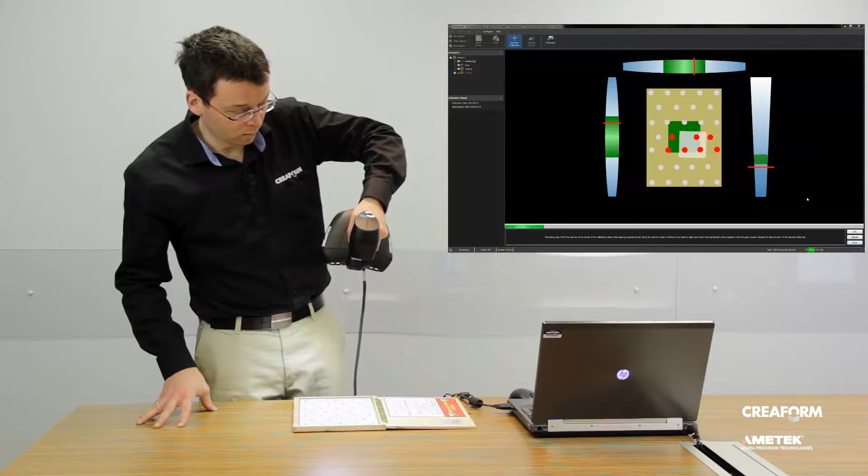Performing a scanner calibration is always good to do once in a while, especially if you're traveling a lot with your scanner. It's very easy to do—just aim at your calibration plate. This will optimize the performance of your scanner as well as the color calibration and ensure that you get the most out of your GoScan 20.

Okay, so our scanner is plugged in, our demo part is ready, but before we start scanning, let's take a look at some of the important settings in VXelements.

First of all, the project node. Here you'll find the capture texture button—basically an on-off trigger for the color camera on your scanner. If turned on, it will allow you to use texture either to capture the colors of the object or to refine the positioning of the scanner. If turned off, however, it will improve the capture frame rate of the scanner, leaving more bandwidth for the other 2 cameras. In our case, for the purpose of our demo, we'll leave it turned on.

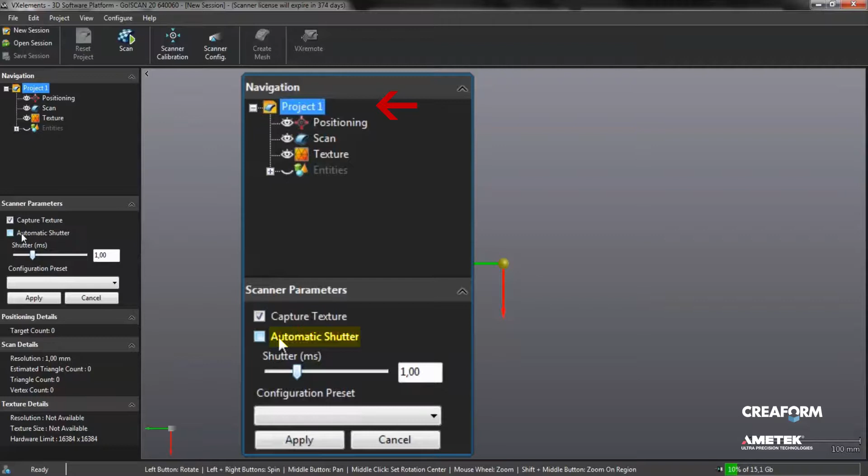Automatic shutter will constantly adapt the camera exposure to the colors of the object. It's good for objects with important color variations, but in our case we'll turn it off, as our demo part is a rather uniform part.

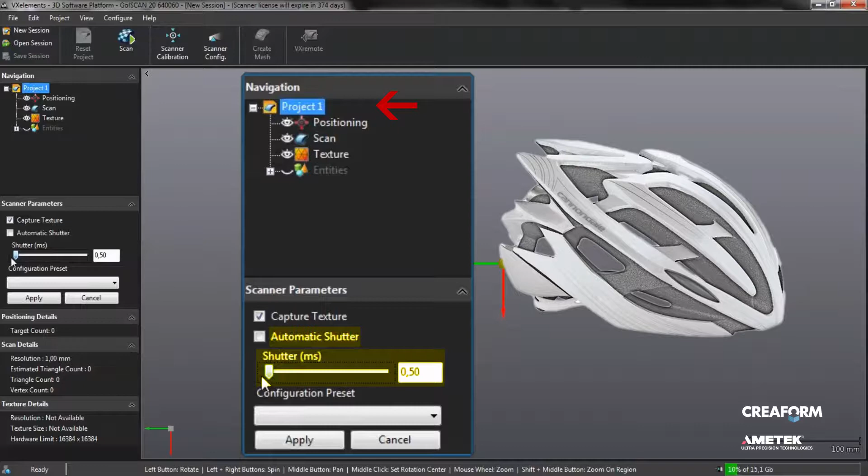If setting the shutter values manually, setting your shutter towards lower values is good for lighter objects or white colors. Setting it manually towards higher values is interesting for darker colors. In our case, for the demo part, we'll leave it as a default value.

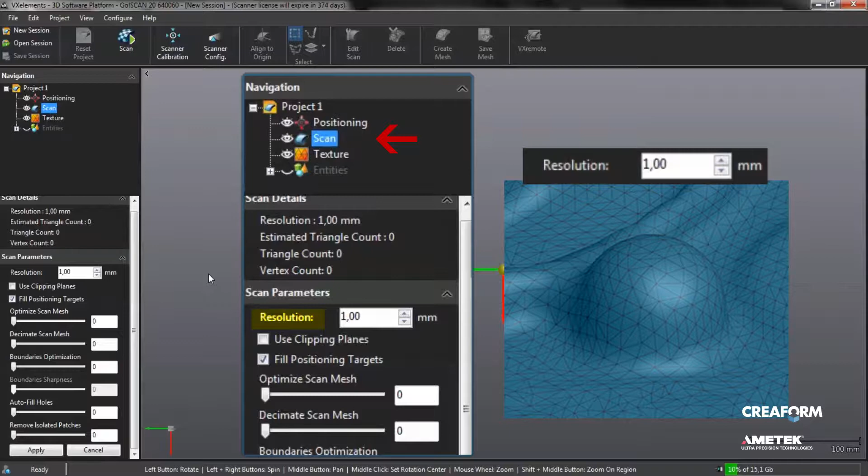Next is the scan node. This is where you set the resolution of the scan, or the size of the triangles that are going to be used to reconstruct the mesh. A finer resolution provides more details, but the finer the resolution, the more data you will get and the more demanding it will be on your computer. So to scan something like our demo part, I like to use a resolution of 0.5.

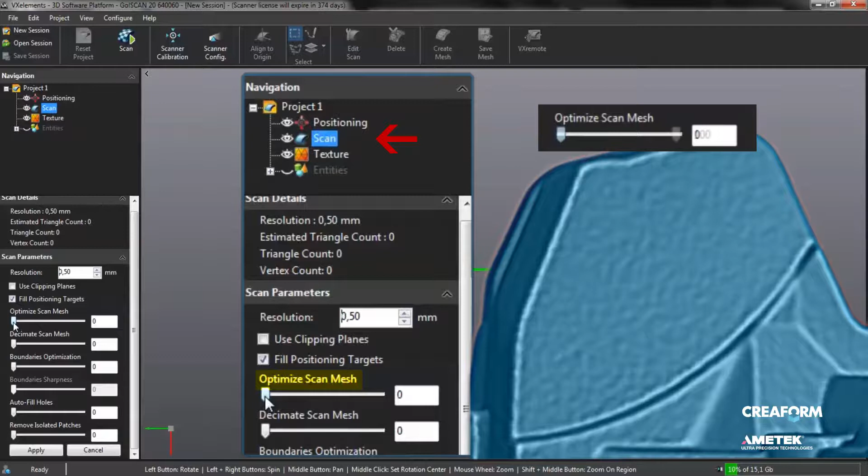Next, the optimized scan mesh is something that smooths the data and keeps the edges sharp. It's particularly interesting for prismatic parts, and for the purpose of scanning our demo part, we'll set it to the very maximum limit. Next, it's interesting to set a certain value for remove isolated patch, so I'll set it to 20 here. This will automatically remove unwanted data that's flying around your object. No need to use other parameters for now.

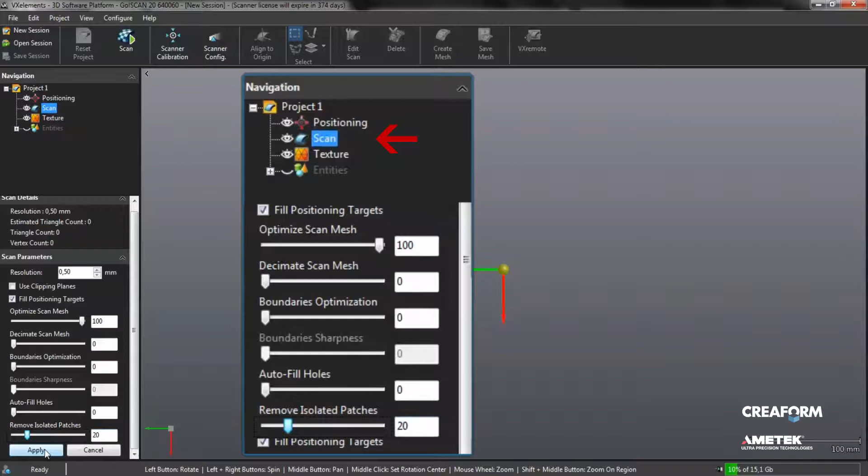We'll just click apply. Positioning node is where you have different options related to the positioning of the system. In our case, we'll turn on use natural features. This will identify recognizable elements of the texture that are usable to improve the positioning of the system.

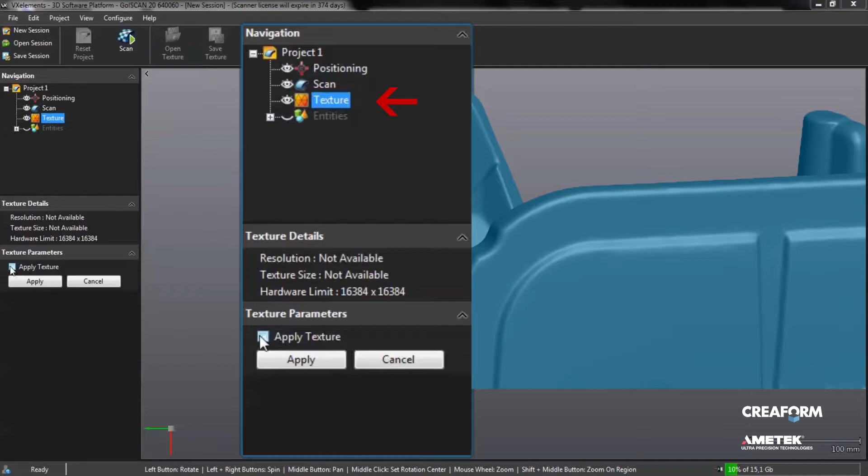Finally, the texture node. This is where you access options related to the texture. So of course, to scan our part in color, we'll click apply texture, and we'll leave the values to default, as they're going to do a pretty good job with our demo part.

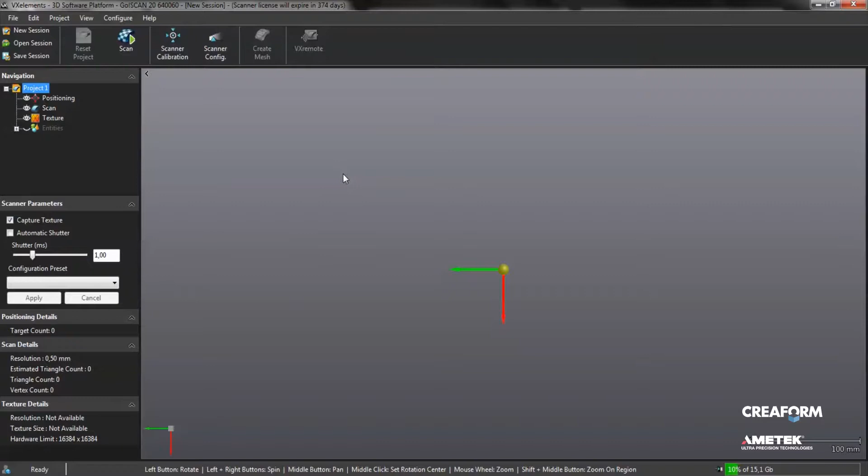If you wish to save time, you can always go to your configure menu, in session parameters, and select save current settings as default session parameters. This way you won't have to run through all these settings again for your next session.

So we're now ready to scan. Before we start scanning, you should know that having targets applied onto your demo part is not mandatory, but is definitely going to help. So when you're ready, simply place your part onto your turntable and start scanning.

When scanning a part, hold your arm steady and at the right distance, and manipulate your part using the turntable. This makes it much easier not to get lost, and if you ever do get lost, go back to a known target location to resume scanning directly.

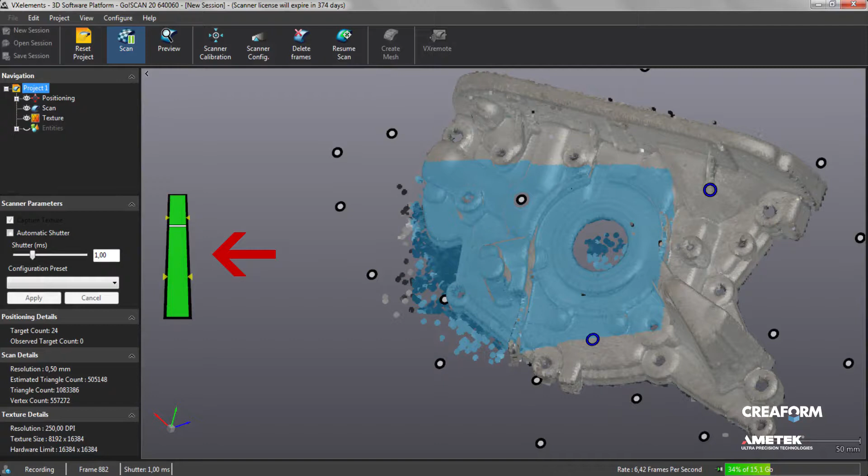When you're scanning, keep an eye on the distance meter located at the left-hand side of the screen. This device will let you know if you're scanning at the optimal distance away from your part. If it turns yellow and eventually red, this means that you're scanning too close to your part. If it turns blue and eventually dark blue, this means you're scanning too far away from the part. Try to keep it in the green zone. This means that you're at the optimal distance.

And there you have it, a very good quality scan made in no time. What's actually great with VXelements is what you see on screen is what you get. Once you stop the scan process in VXelements, what you actually get is a single layer already triangulated mesh with texture already applied.

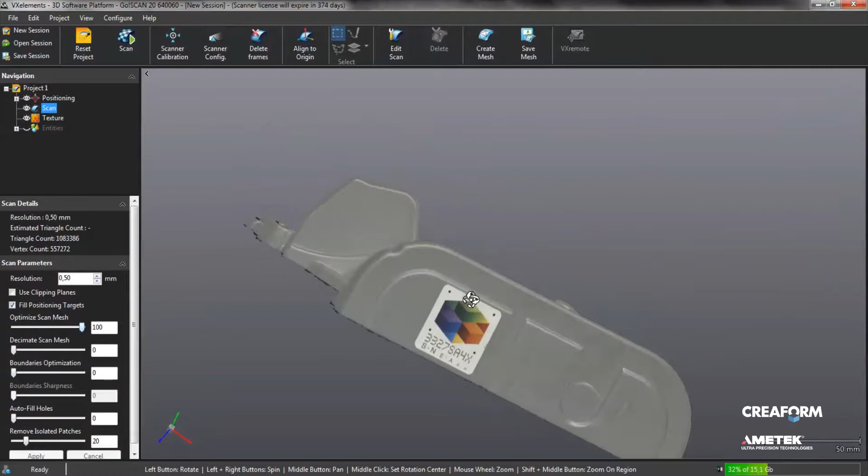As you can see, texture quality is very good, and if I flip the part to show you the texture element in the back, you can see that the texture is very good quality, very crisp.

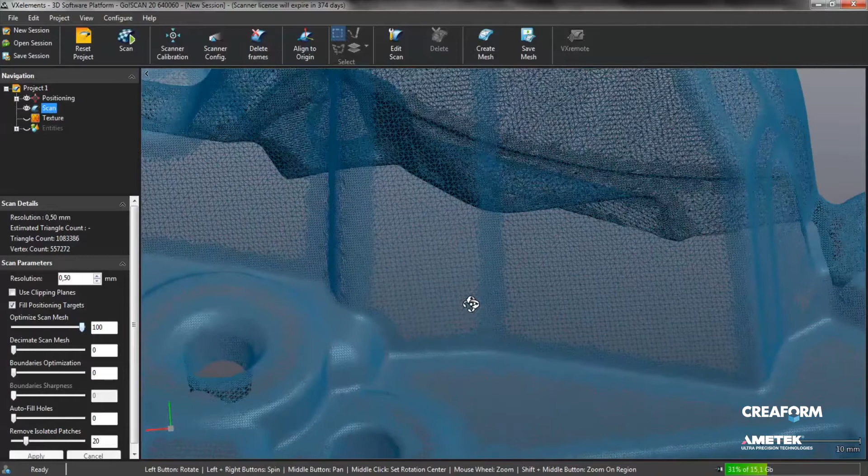Turning off the texture, I can also show you the surface quality. You can see it's pretty amazing, and I can also show you the wireframe here. Zooming in, really a single layer, very good quality surface.

So if you're satisfied with what you see, all there's left to do is click File and then save the mesh or save the session file. Or if you wanted to go back to your scan again and start scanning, you can simply hit the scan button again and add more data until you're satisfied with the results.

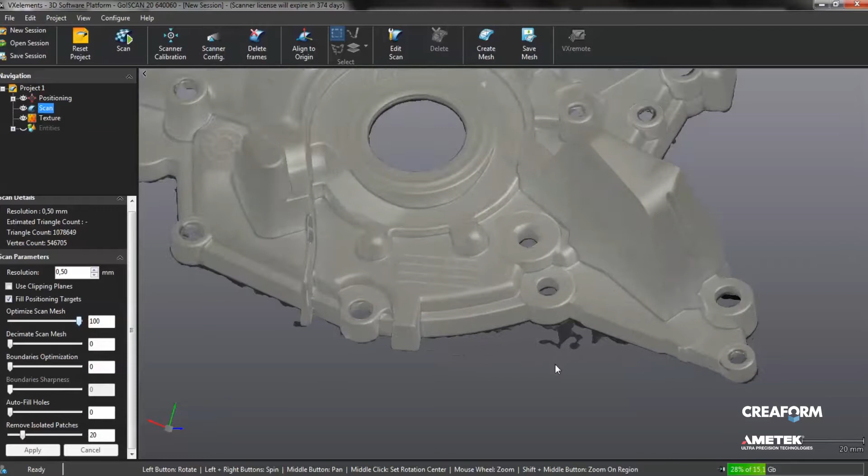So you might have noticed that we have some triangles here that are attached to our part that we do not need. A couple of things we could do: we could go to Edit Scan and select them manually and delete them. But another thing we can do is use a clipping plane. So this is what we're going to do here.

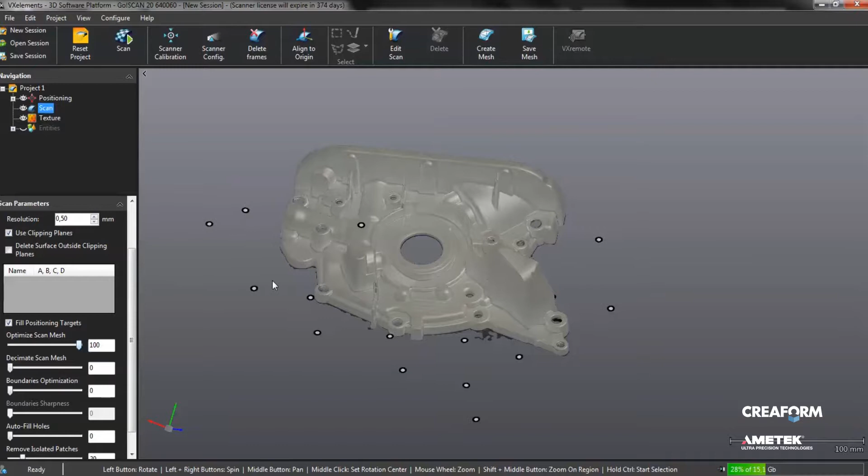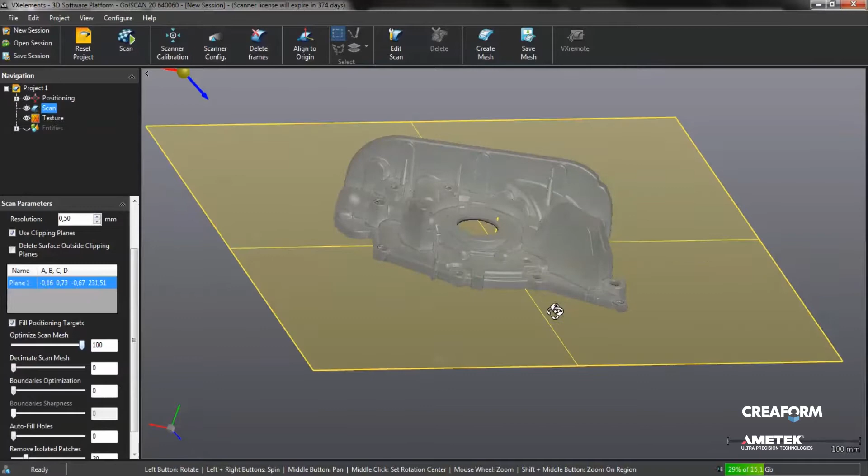We're going to create one using the targets that were on our turntable. Just select them here, make sure that our part is correctly oriented, and then make sure we clip these triangles. Click the Apply button, and there you have it. A very clean and easy way to get rid of any surface that belongs to our turntable and get a very clean border all around our demo part.

Demos rarely stop at the demo part, and chances are you'll be asked to scan something else. So this next segment contains tips and tricks on how to get the most out of your GoScan 20.

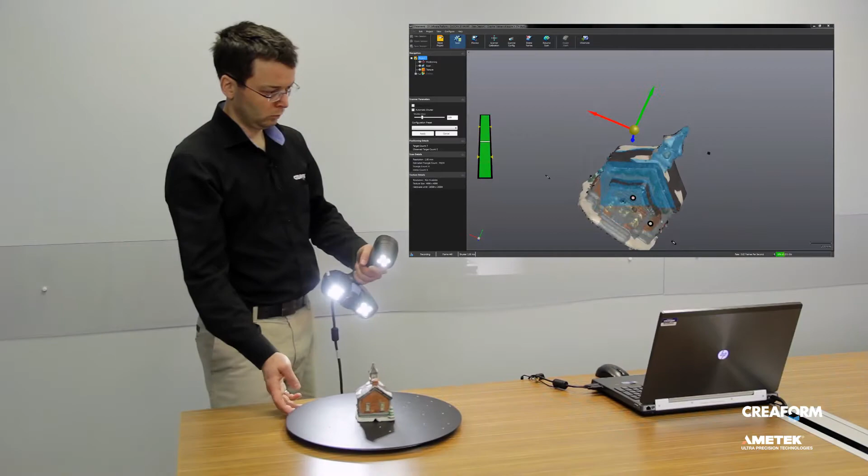Start by scanning most of your part using your turntable. Pick your part and place it directly onto your working surface. Define a resume location and scan the bottom of your part.

You can also flip your part onto your turntable, but remember to delete your turntable's targets in VXelements before you start scanning again.

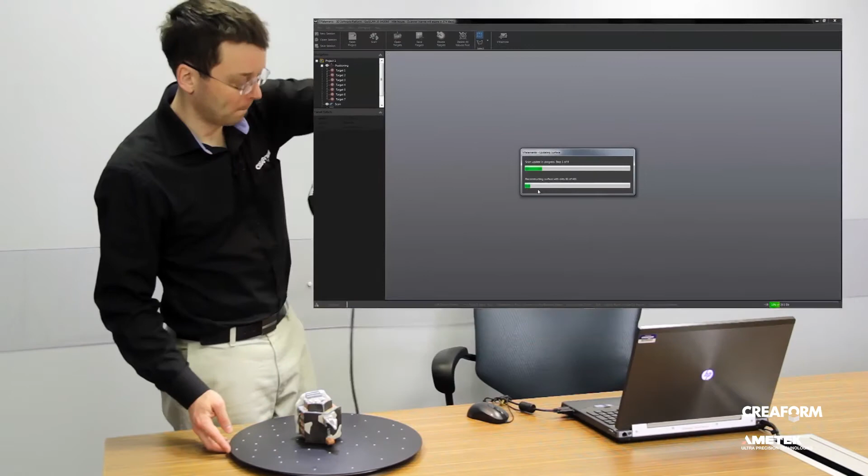If you want to get the most data when scanning an object using your turntable, one of the good ways to do so is to tilt your scanner sideways this way. If you want to do this, just remember to tilt it on the left-hand side, keeping the geometry camera at the very bottom. This is what will lead you to best results.

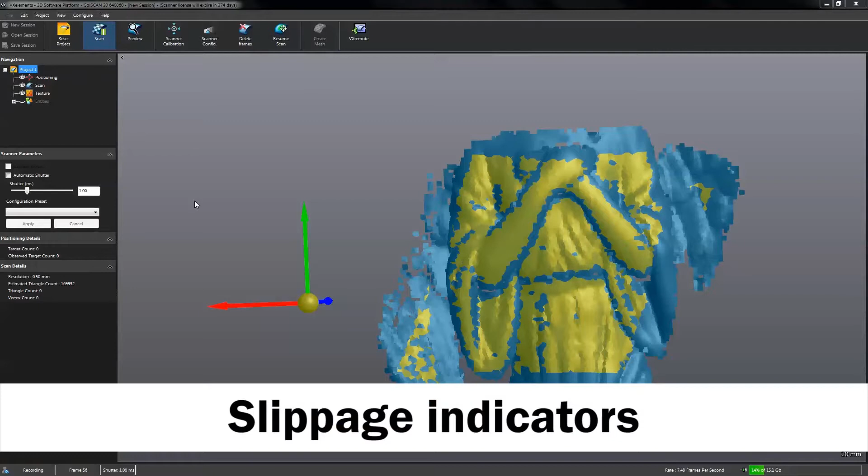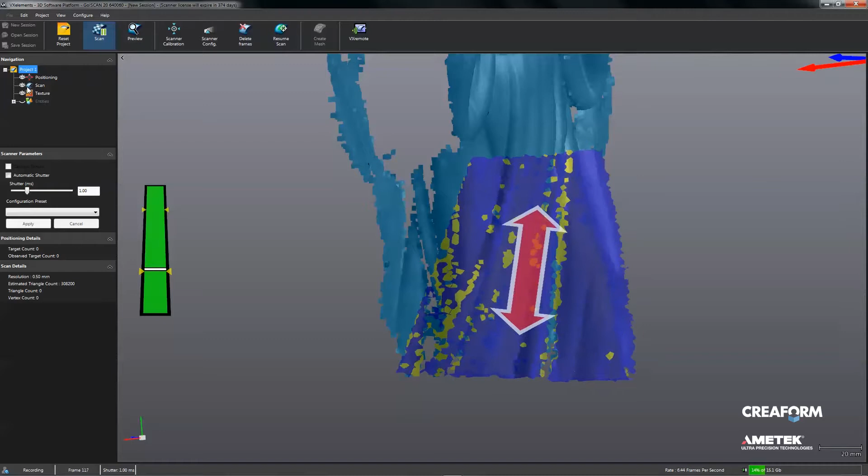If you're struggling trying to scan a certain area of a part for some reason and wish to understand why, you can always turn on the Show Slippage Direction from the Positioning menu. It will inform you when particular areas of an object are difficult to scan and show you where the ambiguity is coming from. Yellow arrows mean an area is slippery but scannable, and red arrows mean the area does not provide sufficient information for positioning. Applying a few targets here and there will improve positioning and let you scan this area without a problem.

Clipping planes are very useful when using GoScan 3D, as they provide you with a virtual limitation preventing you from collecting unwanted data. You may create as many planes as you want, just remember to have the planes' normal pointing at the data you want to keep.

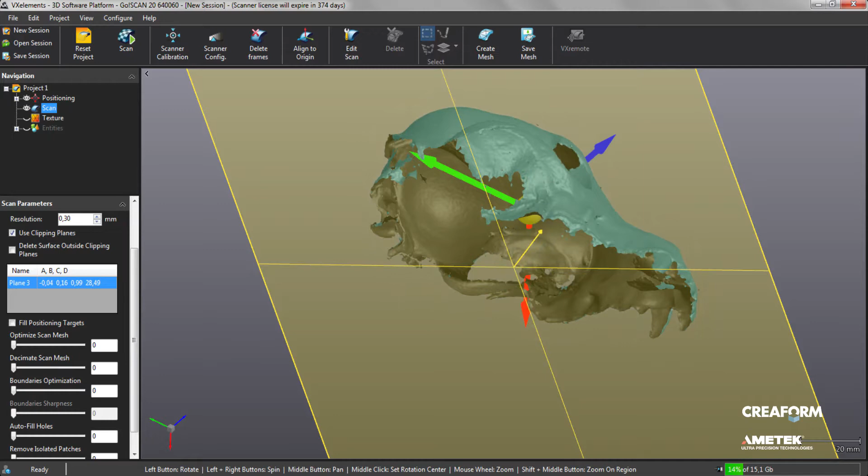You can also create clipping planes at any point in your scan process. As an example, you may start by creating a clipping plane on top of your turntable using the targets on it to create the plane. This will prevent you from capturing any part of the table and save you time at reconstruction, as you will not have to compute the table surface at the end.

When you're scanning an object that has edges and you're trying to go from one face to another, try to keep your scanner in the same orientation as the edge you're going around. So this would be good. This would be more difficult. Using this orientation will help you keep tracking when going from a face to another.

One of the typical questions with GoScan is, which one do I need? What are the differences between the two? So GoScan 20 really is all about high resolution. Its smaller field of view allows it to capture even the finest details of an object, and this also applies to texture, as it will provide you with a much crispier texture than the GoScan 50.

GoScan 50, on the other hand, really is all about speed. Its larger and deeper field of view allows it to capture the shape of objects much faster than the GoScan 20. GoScan 50 is ideal for medium to large size objects with medium to low complexity. GoScan 20, on the other hand, is more for smaller, intricate objects, but can also be used on larger objects with the use of targets.

Now, if you want to find more information about these two, remember that there's a document comparing the GoScan 50 with the GoScan 20 available online.

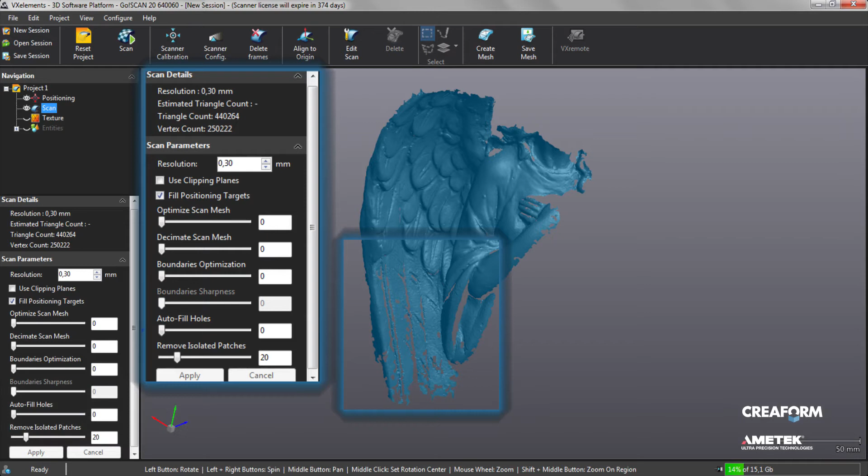Noisy surfaces are generally caused by an insufficient amount of data capture. This will show even more if you're using a finer resolution. Capturing more data will fix the problem and improve surface quality. Since data is processed in real time, refining your data this way will not progressively increase the amount of memory required and eventually lead to a crash, as it would with other competitive products.

One of the typical challenges when doing a demo is, can you scan my smartphone? Now, smartphones are generally black, shiny objects, and they're very difficult to scan directly. One trick to do it would be to apply some spray powder on it, and this is definitely not recommended for a customer's phone.

A typical challenge encountered when doing a demo is, hey, you have a high-resolution scanner, can you scan this? Now, coins and keys will rarely lead to good results, and you should avoid scanning them as much as possible. Try to focus on your customer's application instead.

Our triangular pyramid references will definitely be helpful when scanning with your GoScan 20. Supplied with 3D scanning turntables, they provide you with targets at a 45-degree angle. They will ease the capture process furthermore and provide you with best results. Be sure to use them whenever possible.

So this concludes our video demonstration for the GoScan 20. Remember to keep practicing and keep an eye out for software updates. Now, I hope you have enjoyed this video and that it will help you do better demonstrations with your GoScan 20. Thanks for watching.